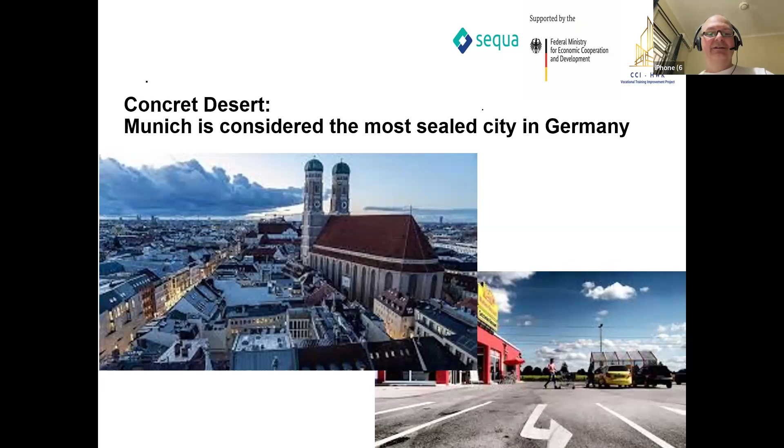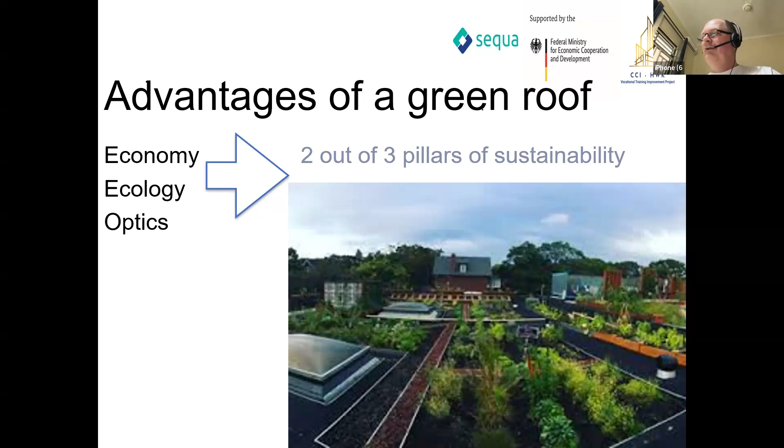Let's look at some additional advantages of green roofs. We can see noise reduction: green roofs can reduce noise. We have a cooling effect from the plants. This is very important. One day we took the temperature on a sealed roof, which is most of the time dark gray or even black, and measured even 95 degrees. If you put a green roof on top and take the temperature near the plants, same roof, same weather, instead of 95 you get around 35 degrees. So the cooling effect is very important.

Water retention, you can see here in this picture. Water retention means we try to hold back rainwater on top of our roof.

So plants will grow, we keep the water there for dryness, the plants will stay there in water. They can take the retained water from the system back again.

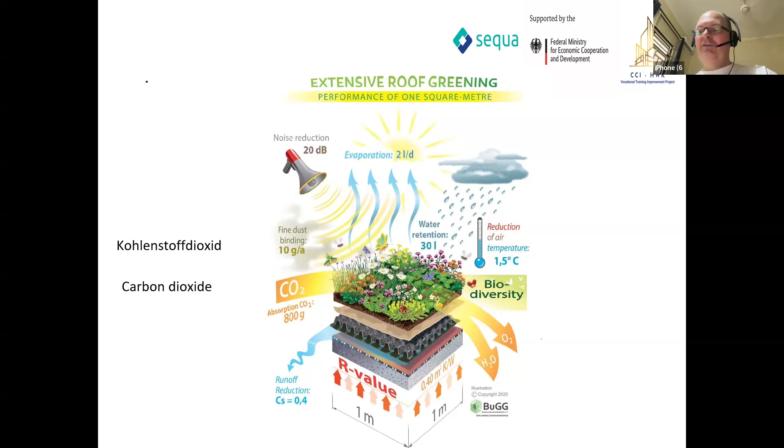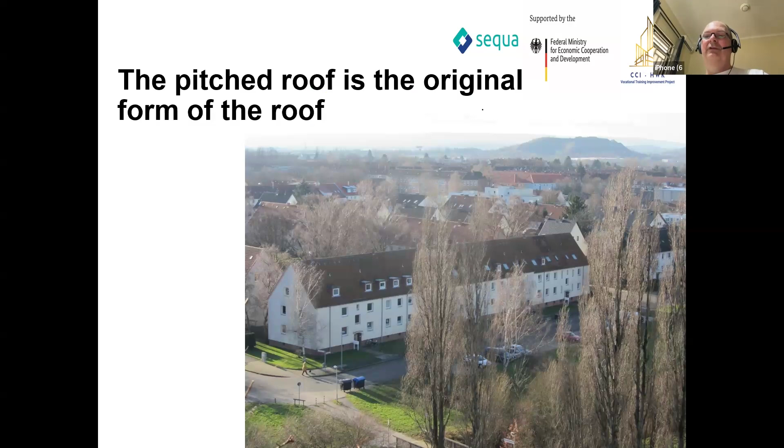And as you can see in the next picture, we are not just talking about flat roofs here today. The original form of our roofs was probably the pitched roof, and green solutions are possible there too, like you can see in this nice picture. So also for these pitched roofs, we can put plants there. Green roof is also possible on this kind of roof.

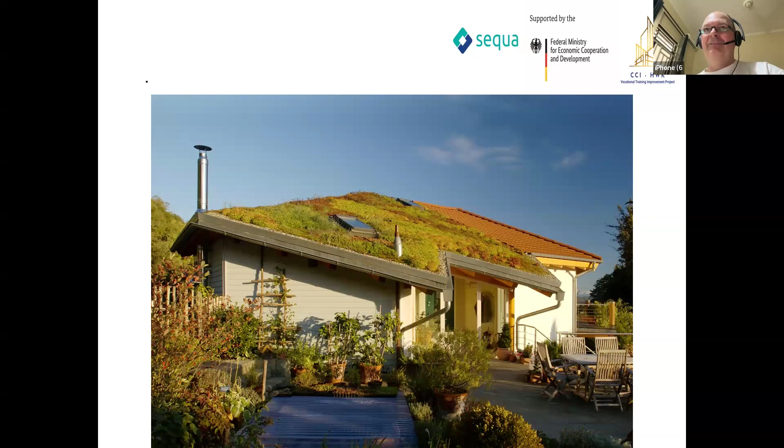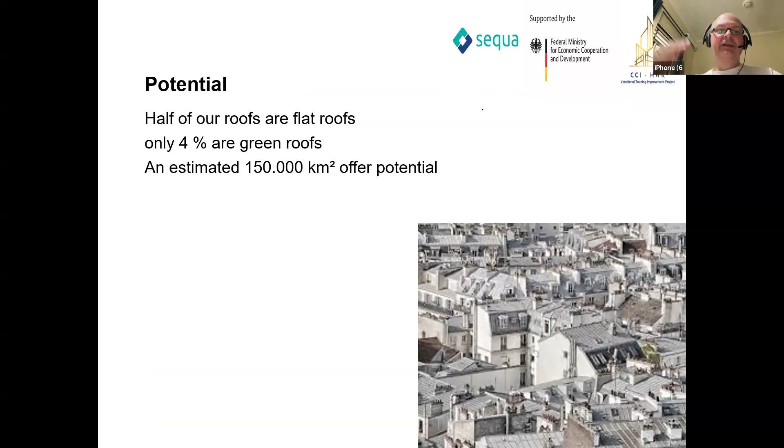But yeah, the truth is something else. Today about half of all roofs may be flat, but so far we estimate that only around 4% of these are already greened. So that leaves us with an enormous potential for greening on residential buildings, housing complexes, commercial properties, like you can see in the following pictures, and storage facilities.

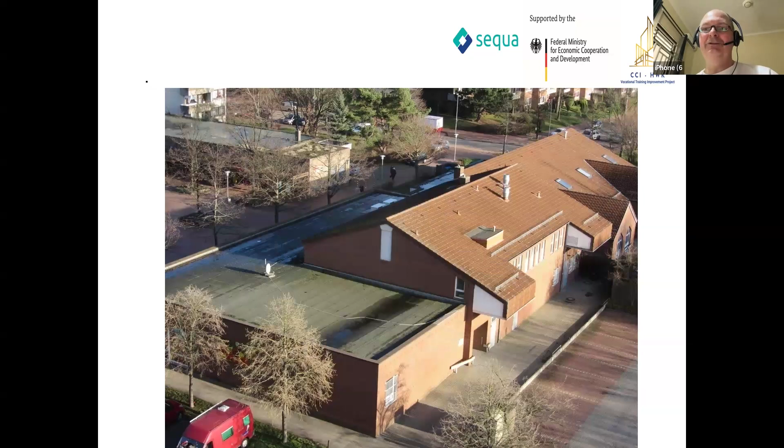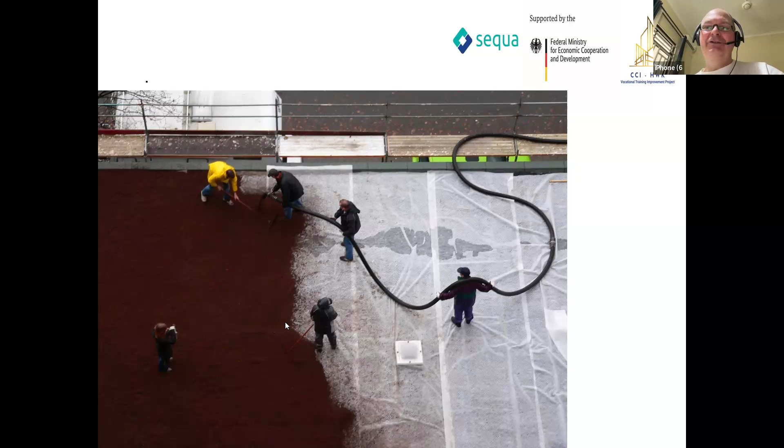And then, in the next picture, you can see only a few weeks later, a blooming landscape emerges. And with it come impressive economic benefits. Like we can see already, this was the same roof, right? Where you could see the roof was working, and the last picture was the same roof where we did it. Yes.

So now I want to show you some more benefits, the economic advantages. If we do this green roofing, we expect a long life for our sealing, really about 40 or maybe 50 years. We have several roofs where we did this green roofing, and only at the corners where you still can see the membranes, we changed it sometimes after 20, after 30 years. But in the whole roof, it still used the same membranes for 30, for 50 years, no problems. And there's an institute that already did the checks on this, the Fraunhofer Institute.

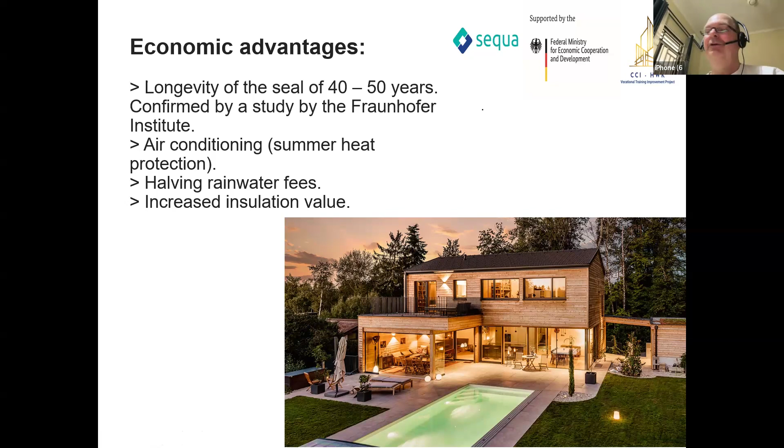I want to show you the next picture, what we call the sedum roof. Why sedum? The plants you can see here, we call sedum plants. This is very easy for us to do. You don't need to be a gardener. You don't need to know a lot about plants. Every roofer can do this. Someone like me, yes, because normally we do the sealing, and I'm not a gardener, so I don't know a lot about plants. But this is really easily made by us.

So sedum means these are plants. We get it in a box, and we just need to throw it. It really is like this. We throw it on the roof, and we wait for them to grow. It happens very easily, even in small places between stones. They can grow.

So we don't need a lot of soil for this kind of roof. It depends on the place where you are, but I made already roofs with only 35-40 millimeters of soil, not more. Yes, we need the drainage under the soil, and then you put this sedum roof. It grows itself. It can stay for a very long time without any water. It can stay even underwater, and in case of hard rain, if water goes away step by step, it will grow again. This is a very easy roof.

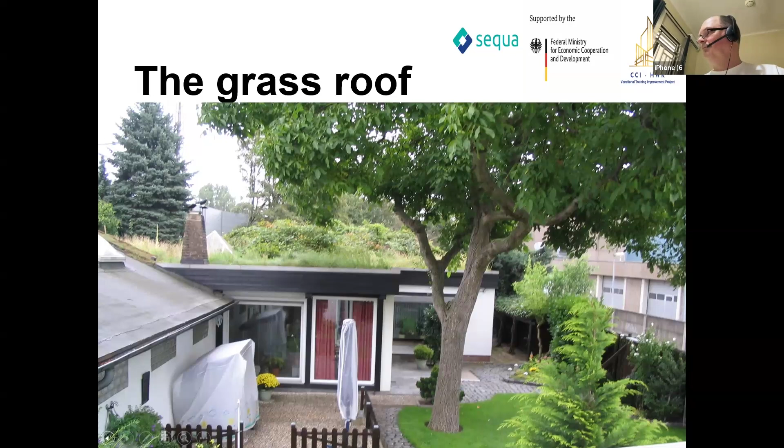I think it's now 3 years ago. I put something like this in Rwanda. I'm very proud of this. It was the first green roof in Rwanda. We put also herbals and spinach there. So the people, they collect some water with this roof, and they let spinach and herbals grow, and it was ready to eat after a few weeks, like spinach needs to grow.

Okay, our next picture shows the mix of all this. It doesn't have to be one herbal roof, one sedum roof, one grass roof. No, you can mix it. You can put flowers and herbs, like in your garden. Put whatever you like, but take care. Your sealing has to be root resistant. This is very important. Otherwise, you will not have a lot of fun with these roofs. You know, roots go through everywhere, so you need a good sealing that can take this. Yeah, and so we can plant there however we like.

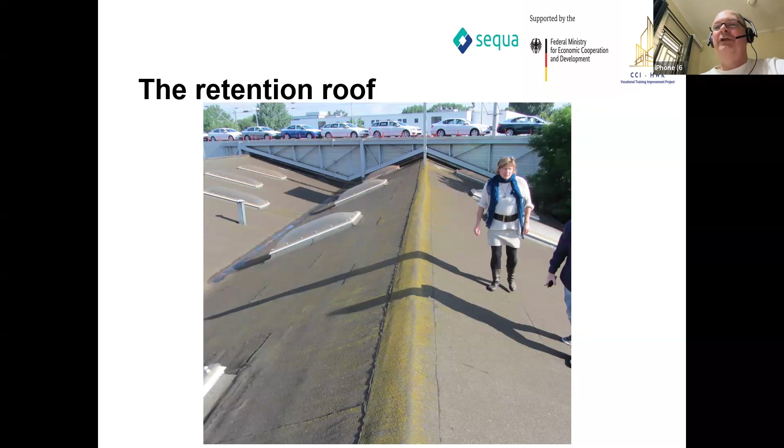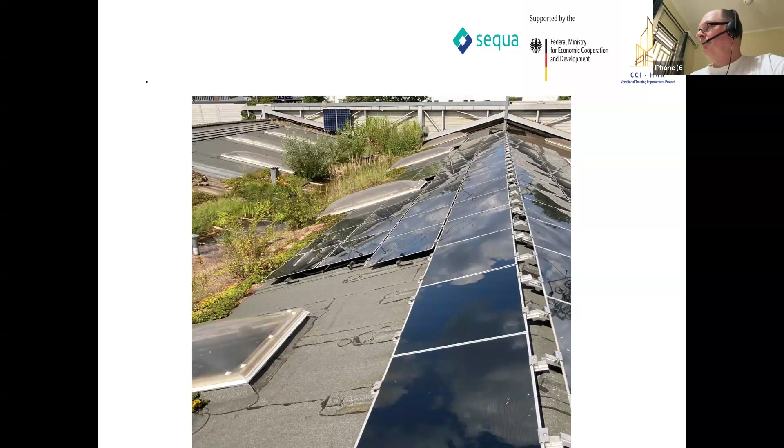And now we go this way, we keep the water on our roofs, we keep the water on our sealing. So the sealing has to be perfect, you know. And this water we can use now for the plants. If there's a lot of water, it will stay there. And the plants keep it however they need. And how do we keep the water on the roof?

We normally use a drainage or a gully to put the water away. And so now you just need something like a pipe. You put it in the drainage, and water can't enter the drainage. It has to climb up the pipe. You put maybe 5, 10, 15 centimeters, however much water you want to keep on this roof, and however much the roof can carry. This is also important. Don't put 30 centimeters of water on your roof or it will fall down.

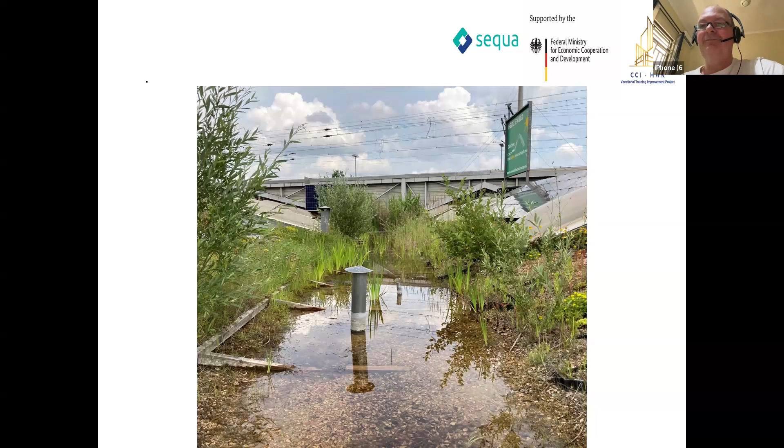Okay. In the next pictures, these are pictures for your heart. I just want to feed you something, you know. There you find also flowers and herbals. And so to show you before and after, just to get an idea how it can change. And you see, there was just the membrane. Now we find the green roofing. And what do you think? Around this roof, there are all these offices. They realized the change.

We were talking about this high temperature, 95 degrees. So they realized already what happened there. They get another air, another humidity there. I don't want to say it's a better life, but yes, you can feel this already. And maybe work is easier now in these offices.

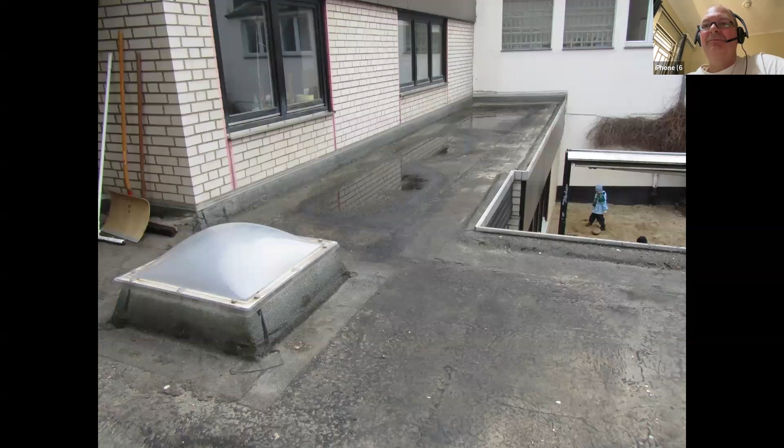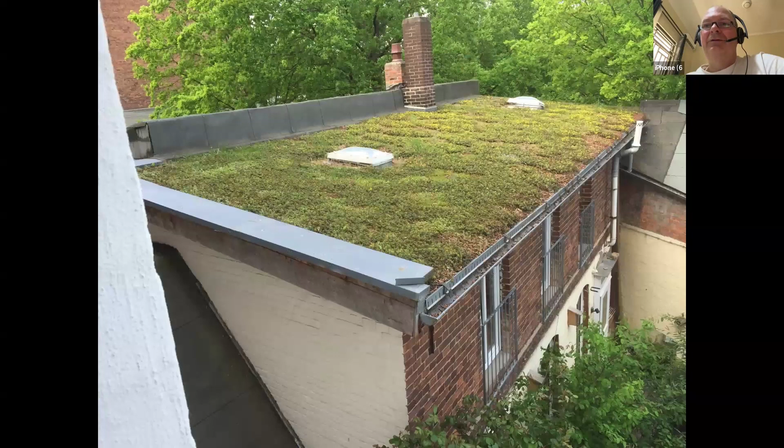I have some other before and after pictures. Yes, very, very small roof, but also a wonderful change. This one also, roof on top. So, and this is quite different. Or what do you think? These are the things we can do, and it's up to you how you put the roof.

We talked up to now about extensive greening. So we can do intensive greening also. That means if you want to have trees there, we put trees. As long as the building can carry this, it's okay. We are also able to put bushes or trees there. It depends on the soil. So we need more soil, we need more water, but everything is possible. Okay, it's a very old building. I don't know if I would put the tree there, but generally we can do all this.

So we continue and we talk about the ecological advantages of green roofing. We were already talking about some of them. So we can say green roofs store up to 80% of rainwater. It depends on how you build it. Even 90% should be possible. The greenery lowers the surface temperature. Well, we talked about this, remember these offices and the 95 to 35 degrees. Heat reflection is reduced. This is also an effect they got there in these offices.

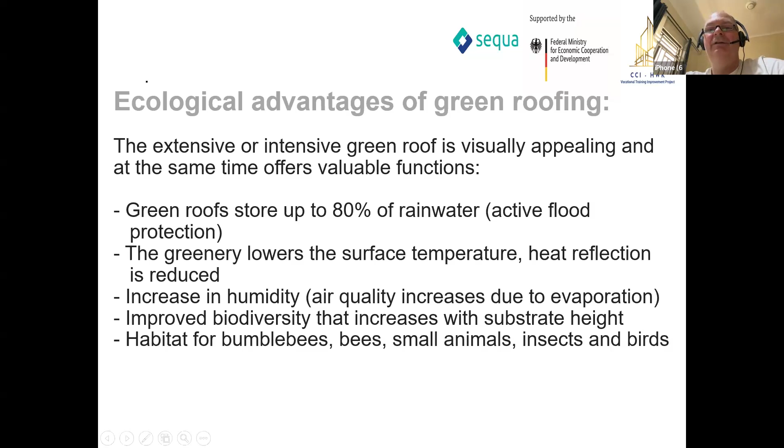Habitat for bumblebees, yes. Rest areas for people and animals. You saw this picture with chairs and tables. I don't know if you like to climb up your roof, but yes, it's possible, and we can make it a nice place. Fine dust binding, we talked already about it. Green facades also possible. Later I will have some pictures about green facades. The longer lifespan of the roof waterproofing, sure. Additional leisure and living space. And the combination of green roofs we saw already.

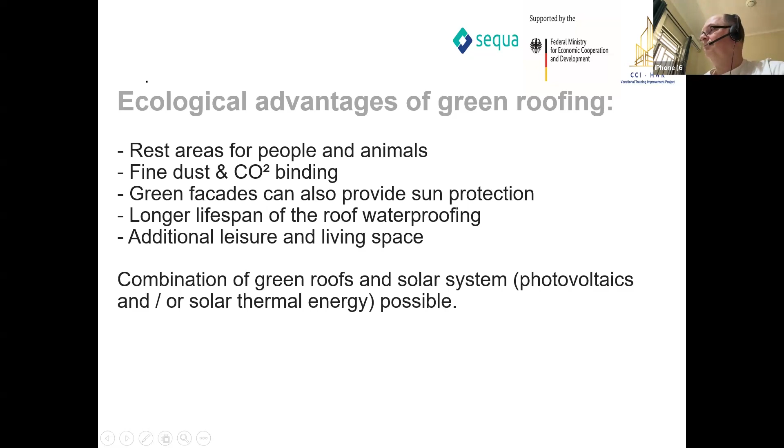I will give you some pictures now about the things we were already talking about. Yeah, the bumblebee. Animals, you know here very well. Bees. Yeah. Sponge City.

Sponge City, very important. We have to think bigger. We don't talk only about our roof. We have to think about the whole city. The whole city has to be able in our future to collect water. Water should not be misery, should not be dangerous for us anymore. We should deal with water. We should find places where we can collect water, and very important, where we can use it if there is no rain anymore for several weeks or maybe months.

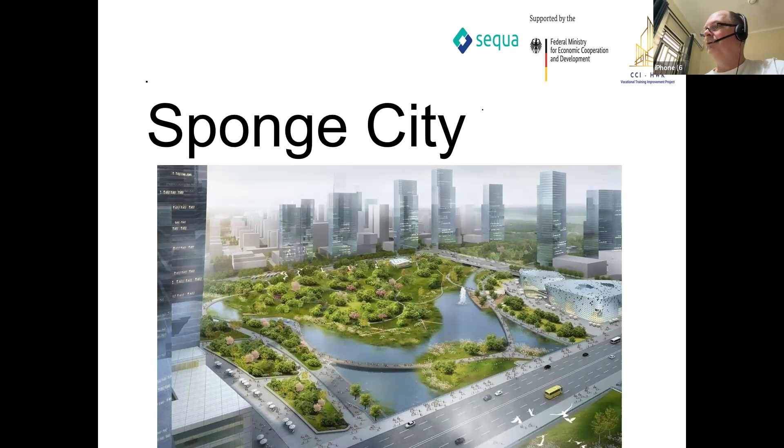We already have countries that suffer for a long time. I read something about Madagascar. I think they talk about 7 years with no rain. Can you imagine 7 years, no rain? Yes, we need to find solutions for this. You know all these problems, rain, storms, and things like this. So we just need to find how we can use this water and how we can build a way for the water where to go and not to destroy our houses, our roads, and take everything. Water is important if you know how to deal with it.

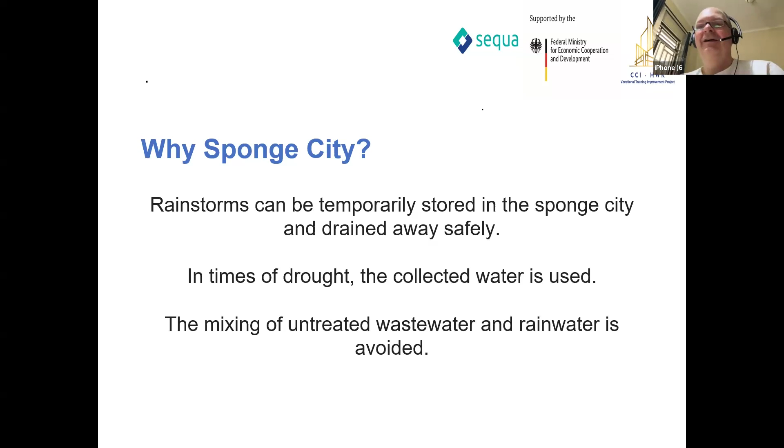And I want to show you a small idea how we can collect, how we can use this water. So rainwater is coming, and we find a way how to bring it safely into the river. We have this bioretention. At least we need plants. We need green places in our cities.

And I was there in Sri Lanka. I saw Colombo and the region outside Colombo. You do it in a very nice way. But this is, I think, your tradition already. People from Sri Lanka have another relationship to their environment. It's not like in Munich where we put concrete everywhere. So these can be solutions for all this. Sure, the green roof, rain garden, sunken square, we need to collect the water, to bring it somewhere. And not to put concrete and streets everywhere, and forget about the natural systems.

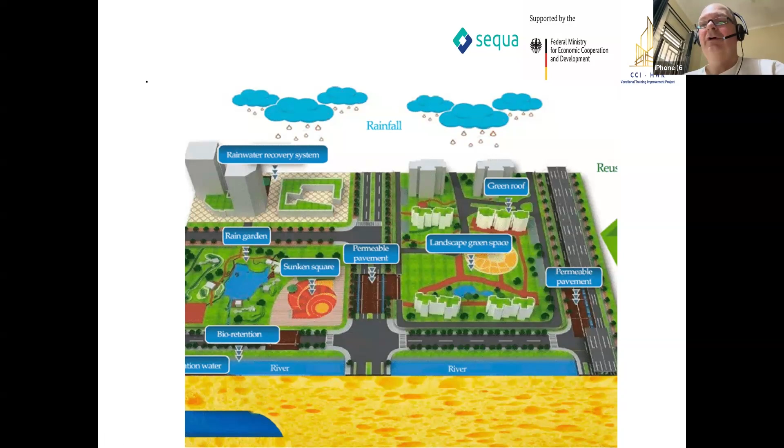So I hope this can be an idea if we plan cities in the future. So I want to show you some pictures about green roofing and photovoltaics, or solar panels generally. In these pictures, you can see a small system for photovoltaics. And we use here also the cooling effect from the green roof, like in the next picture also.

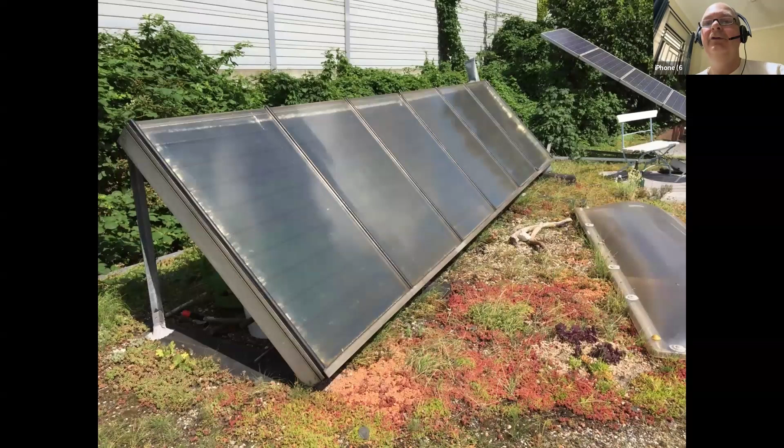There we find solar panels to heat up water. And we can build it very close to our green roof. Yeah, this one also, we just continue. So why do we do this combination of green roof and photovoltaics? To tell you the truth, there are always people who say, you can't do this, this is dangerous in case of fire and blah. Yes, it may be like this.

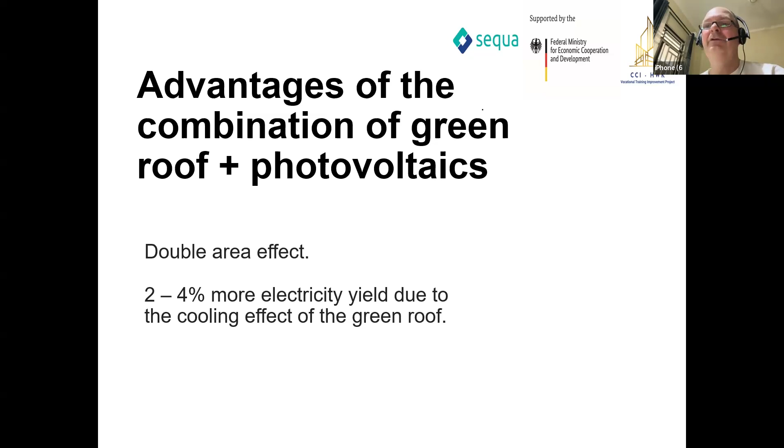Everything is dangerous. You know, even to find all your courage and to go to work tomorrow morning can be dangerous. But this should not stop us from doing the good things. If we know how to build it, we don't need to be scared about fire. And the green roof is even a good protection against fire.

And as you can see here, the photovoltaics bring even more electricity when built up on a green roof. We talk about 2 to 4% more electricity because of the cooling effect.

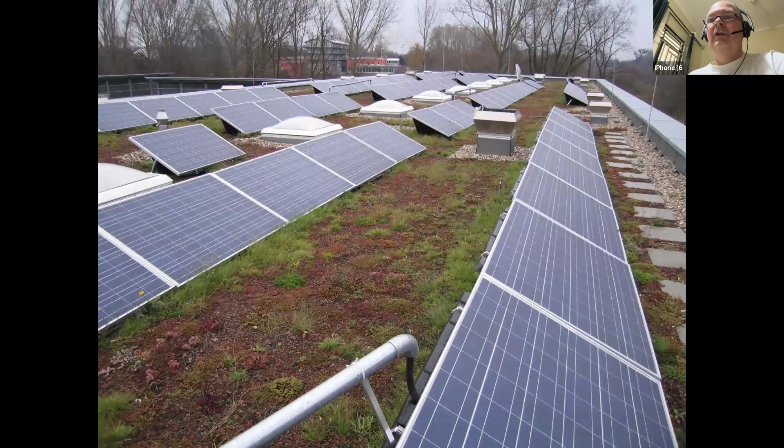Everything there is possible. But don't put solar panels everywhere. We need to control this. We need to climb up the roof. We need to check everywhere. So don't put it totally everywhere. You need to reach these things. You need to control. It's also very important.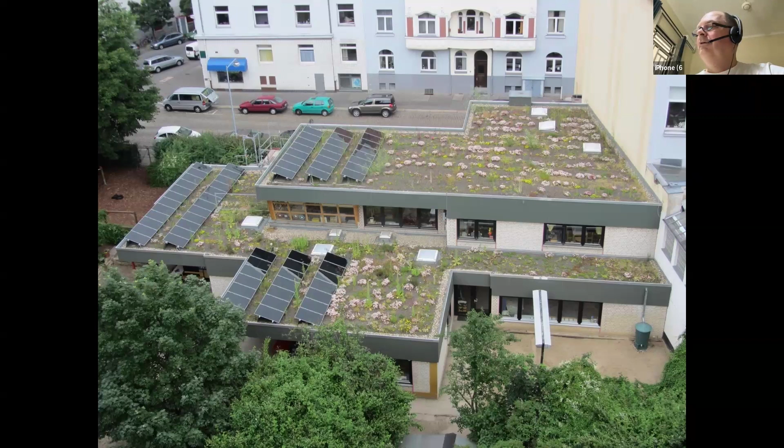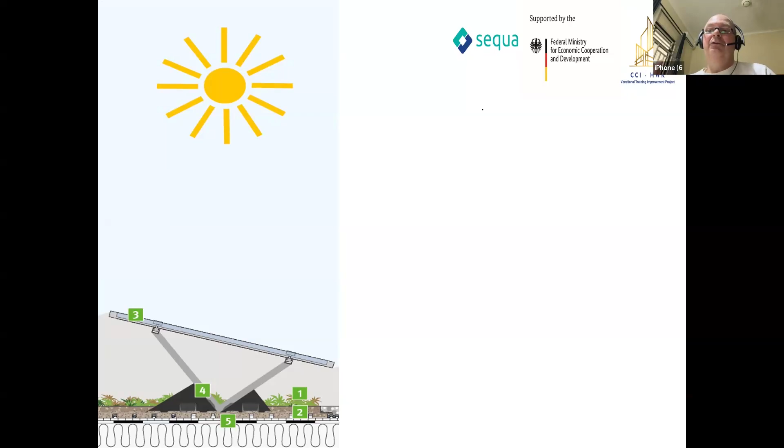Yeah, how do we put this? I try to show you a little system. This is a tool we use. So the solar panels have to be easily clicked on the roof. This is a thing from plastic, and we put it on top of the roof, and then we bring the soil to make it more heavy, so that wind doesn't take it away. I have a picture from this system. Yes, thank you. So you get an idea how we put it there.

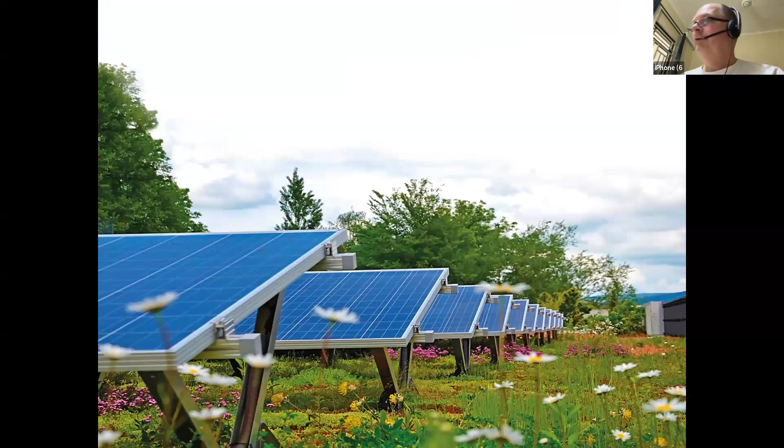Are we still in time or do I need to hurry? I wasted a lot of time in the beginning. Very, very sorry for this.

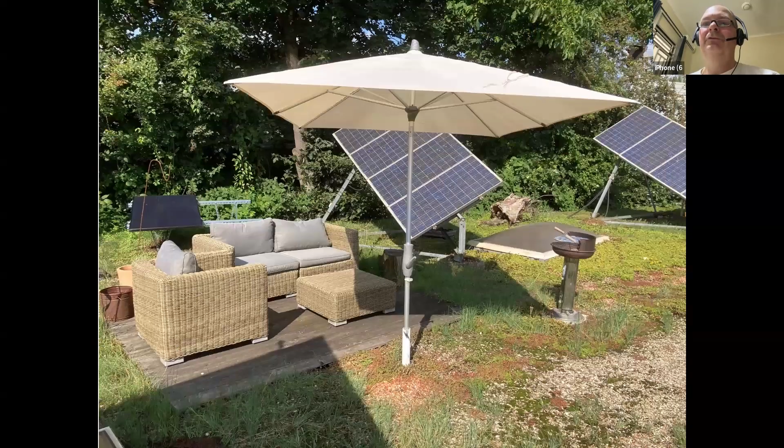Yeah, but you see, you find solutions for everything. And we have these systems already. The producers, the dealers, they thought about how to put these panels on top of the roof. They thought a lot about the soil. We even mix the soil for green roofs, so you can walk on it, you can use it. Everything is possible.

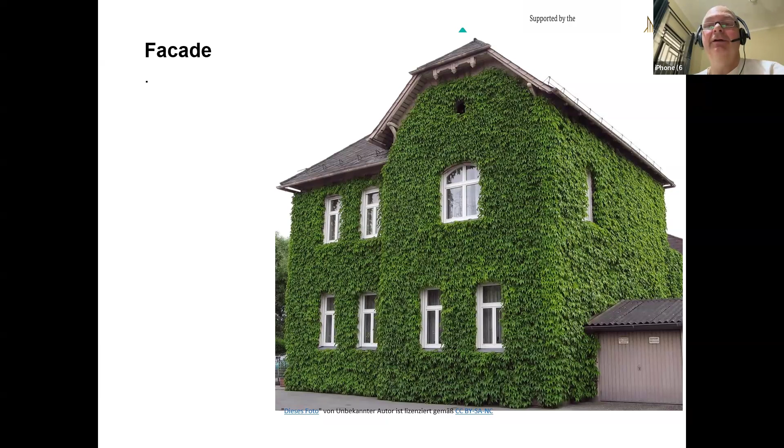Yeah, and here we are very close to the end of my speech. Also, to put green on a facade is possible, and even there you will feel this cooling effect. But you need to like it, and you need to choose your plants very well. I can say we have some plants that don't even need any preparation, any support. They just grow up the wall. They put their prints, their footprints everywhere, even on the window. So you need to take care of all this.

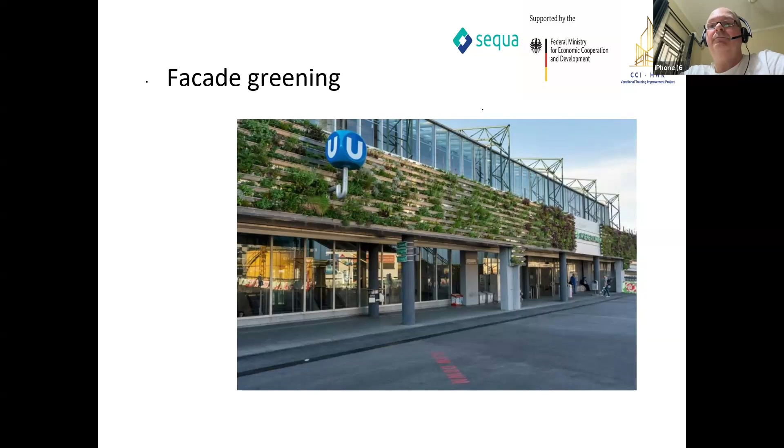But you can also use plants like here in this picture, where you don't start at the ground. But if you don't start at the ground, it means you need to find a system to bring water to these plants. But also for this, we have ideas.

Yeah, I hope you could follow me. I hope you liked it. And yeah, you're free to ask your questions. I hope there are some. Sorry. So Joachim, so if you have any questions, please paste them in the chat so we can see them and relay them back to Joachim.

I don't see any. So it was too much. I talked too much. Or... I would be very proud if you have any questions. I saw something. How do I get it? Someone wrote something. Oh, yeah.

Joachim, the question is, how about the local adaptation to the tropical weather?